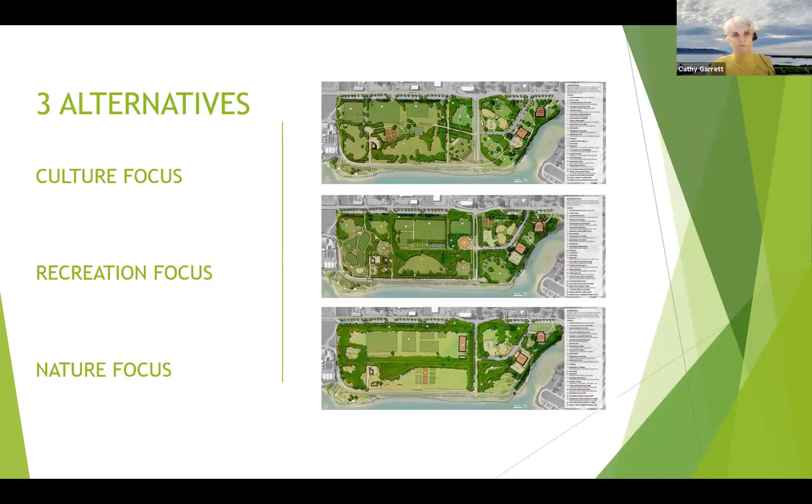So to take you on a walk through the park as seen through the focus of culture. Really at the core of this option is culture and the arts. And it's our intention to be representative of the cultures of the region, who's living here and who has lived here over the years, the centuries, and the millennia.

Starting with the longest time frame, of course, the stories of the Tolowa Dene people and events, and in more recent times, perhaps up to the Japanese sister city and the story of the boat, and finding the cultures of the city today, both Latino and Hmong and other cultures, and then reflecting a little bit on the builders of the city, and then stories of the tsunamis and how they shaped the community. In fact, they are the reason that Beachfront Park exists today after the 1960s tsunami.

So I'm going to start by walking through the park, and I'm actually going to start at this upper right-hand corner where that number 12 is, which is the main entry to the park, where there'll be a park sign, a plaza, some trees identifying the entry, and flags also identifying it. And this is using one of the park entry drives that exists today.

And the cultural core really begins here. It really hosts a gathering of spaces, interpretive signage, memorials, and they're collected along a special path, which we're identifying here with this little white hatch. And if you can follow it, it leads through a portion of the park. There are many paths in the park, but there's some that we're actually designating as part of this cultural core.

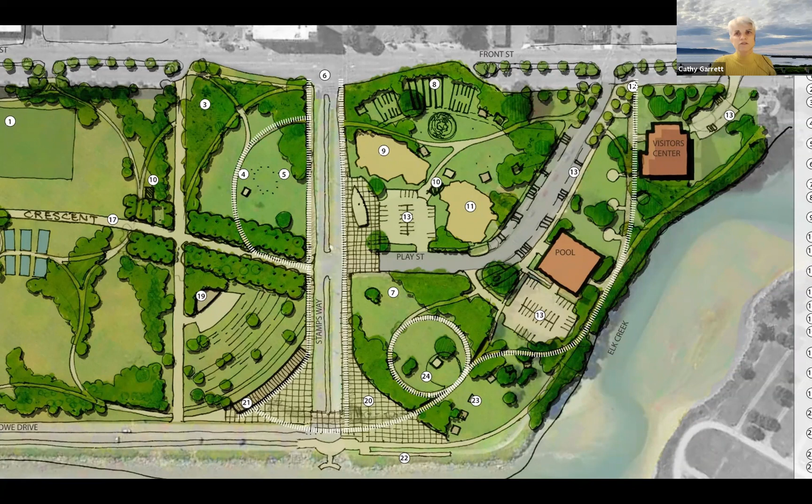So one of the things that came up in the community discussions was the value and interest in trees and massings. And you can see in this scheme, there's significant massings of trees. They'll help buffer the wind, and they'll help define spaces.

It's opportunities for a range of diversities for enhanced habitat, and looking at using both native and climate adapted species, species also of cultural utility and interest. And so the masses of trees that you see here will carry those elements. We can drill down later in the question and answer period if we want to know more about that.

The other thing that we've got here, identified with number 3, near 4 and 5, is the ethnobotanical plantings for education and interpretation, and perhaps guided seasonal tours of plantings useful to the Tolowa.

So that takes us to, if you sort of zoom out in your mind's eye and think about the layout of this overall park master plan, and think about circulation, as I said, we would look to reuse infrastructure.

Stamps Way, of course, is there, as is Play Street. We're using both of them, and we're continuing Play Street on with this new pedestrian promenade, which is central to the park. We're seeing what's called the Crescent. It leads to a covered picnic area, which would serve the ball fields in the upper left, and also the smaller courts to the lower right of that area. There would be a new bathroom at number 10, and actually there's another number 10 at the other end of the crescent, showing this important organizing element of the pedestrian circulation.

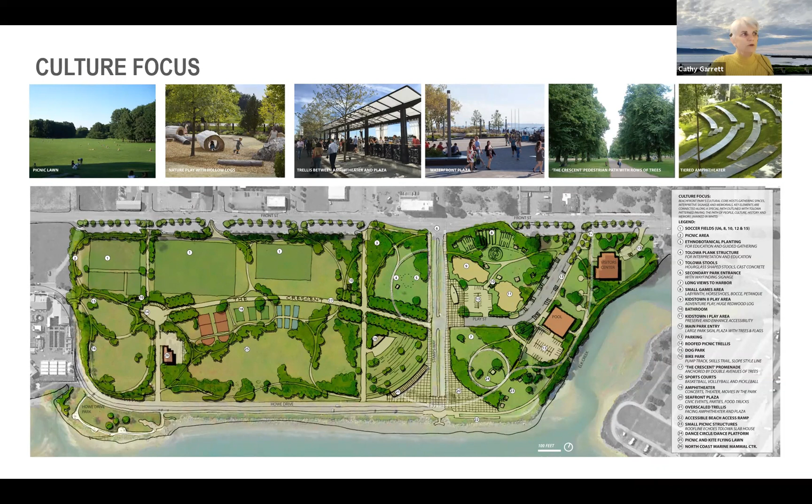Of course, the Marine Mammal Center is at number 26. Then as you move around, looking at number 16, that's where the bike park is. It's shown fairly simply by an area identified for it, but it would accommodate a pump track, slope style line, and skills trail, really a place for the whole family. The dog park is located in the area described as the lobe at number 15, and then you can see the soccer fields at the upper portion there, making the loop back.

In terms of small courts, if you continue on towards the east, you'll also see some additional small courts, horseshoes, bocce perhaps, and then a circular labyrinth there. That brings us to the area around the existing parking, which has been clarified, retaining the existing kids' town and improving it, expanding to bigger kids and more diverse ranges of play, and a memorial boat plaza there, but also that could be a play environment for kids to clamber and climb on, around a range of picnic facilities also in that location.

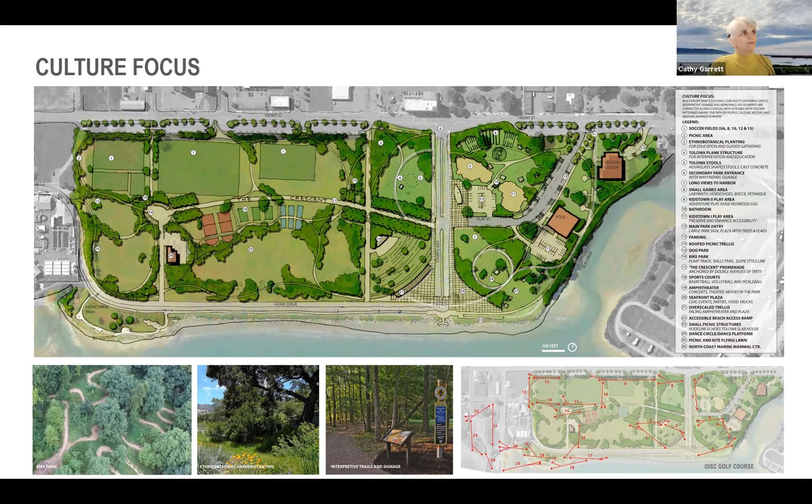Which brings us back to the beginning, and with that, I'm going to hand it to Mark Wessels to discuss the recreation focus. Thanks, Cathy, and thank you everyone for being here.

I'm going to discuss the other two options, which are recreation focus and nature focus. To begin with the recreation focus, Crescent City is already a recreational destination for Del Norte County and for Northern California, with great recreational features adjacent to it, from the national parks to mountain biking trails, hiking trails, as well as water recreation. This scheme aims to make Beachfront Park a rich recreational hub that serves both residents of Crescent City as well as visitors to the city, always trying to balance the needs and in every way maximize recreation in the park.

To begin on the left side of the plan, this option shows a large bike park that has a pump track, slope style line, as well as a skills trail that traces around the edge of this bike park. Also integrated into that bike park are seating areas and picnic areas so that family members of bicycle users can hang out in this bike area and overlook kids or other family members doing bike activities.

Right next to that is a dog park surrounded by a wooded area. And next to that, shown by number 2 here, is a picnic area, which we could see as serving this bike area, the dog park area, as well as adjacent businesses across the street.

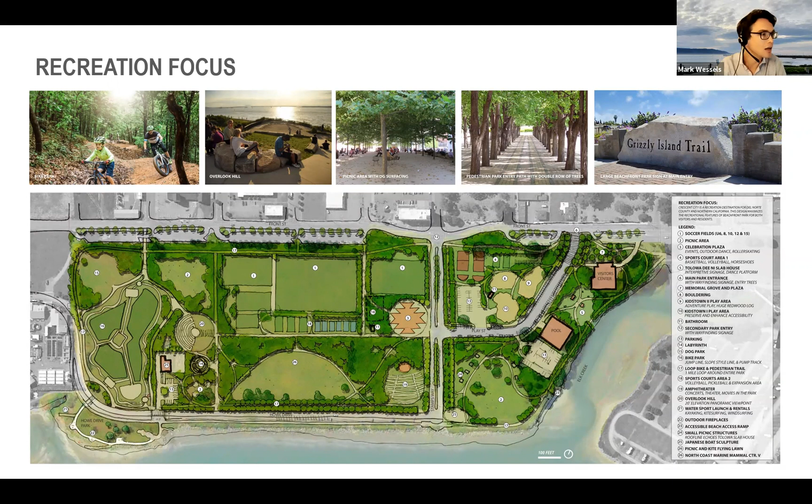Just below that, at number 19, is the amphitheater area. In this scheme, the amphitheater is the most built and constructed, showing a covered stage as well as accessible seating for visitors. The idea is that this could be used both for residents of Crescent City and for larger events—inviting a larger group of people into the park for a movie night, an interpretive talk, a dance performance, or a school play.

The final element I want to touch on in this scheme is recreation on the water. One of the huge resources you have here in Crescent City and at Beachfront Park is Elk Creek, the bay, and the Pacific Ocean. In this recreation scheme, we wanted to offer water-based recreation integrated with the park: an accessible kayak launch, a water sport launch and rental area where visitors could rent kayaks or take a windsurfing lesson, and a place where locals can get access to the water—providing ADA access to the beach and launches so people can get into the water itself.

With that, I'm going to move on to the nature focus, and we will have time for questions following this.

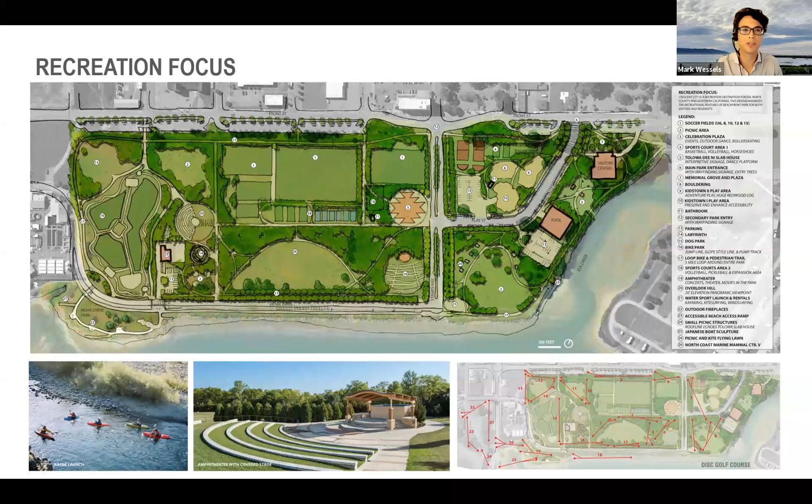There's also the opportunity to create narrower, smaller paths adjacent to that. On those paths, we could integrate optional mountain bike features or exercise equipment like a pull-up bar or a bench for push-ups, providing a varied set of experiences where people can get exercise and get out into nature.

Before I go further, let me step back and say what we're trying to achieve with this nature scheme. Since Crescent City has such amazing natural resources, access to the redwood forest, Elk Creek, the bay, the harbor itself, and the Pacific Ocean, what we want to do with this scheme is provide opportunities for people who live in Crescent City and visitors to connect with nature. That's the focus of this scheme and every piece of it.

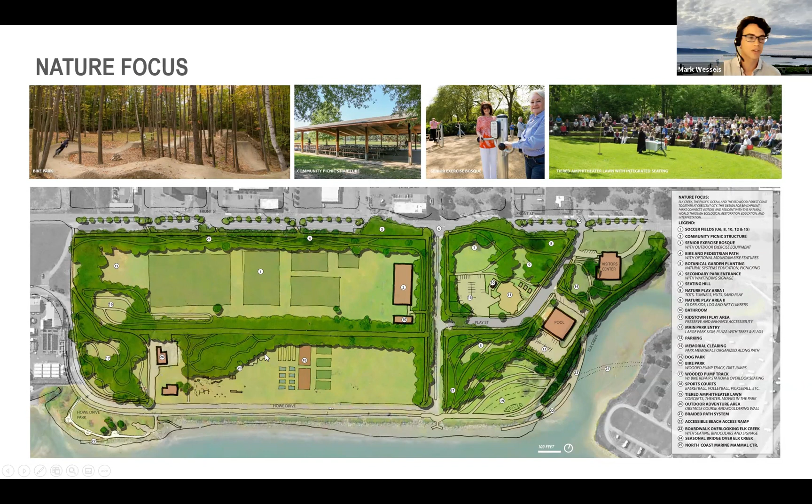To finish up this scheme, I'll just point out the smaller courts located here, some walking paths off the main spine, an area for water sports rentals to connect with the natural systems of the bay and the beach, some obstacle course features similar to a Spartan race type obstacle course, and finally a bouldering wall. This boulder would be a place where kids could play as well as rock climbers could practice their rock climbing.

The final big feature of this scheme is number 23, a boardwalk arching out over Elk Creek. This boardwalk would provide an overlook to look at Elk Creek and out at the Crescent City Harbor. It also has an arm that comes down and ramps down to land on the beach, providing an accessible route to the beach, so you could stand on this and look out.

We imagine interpretive signage here, as well as maybe binoculars to look at wildlife on Elk Creek or out in the harbor. We also show at number 24 a possible seasonal bridge crossing Elk Creek.

So I'm going to pass it back to Cathy to recap the three schemes.

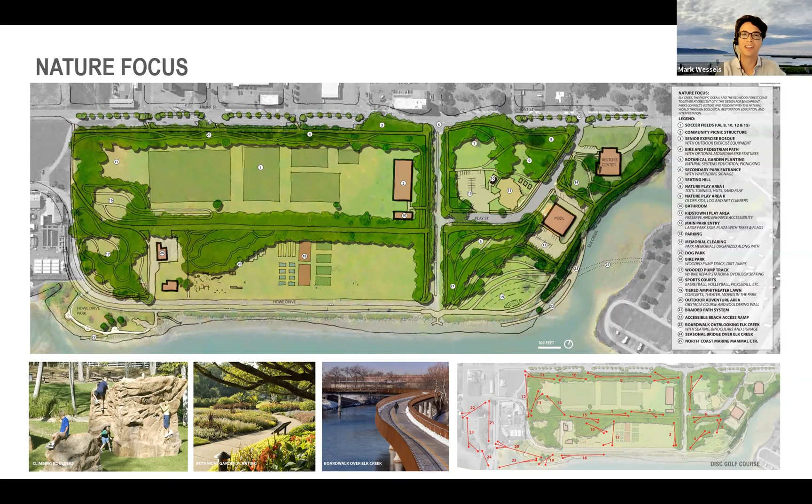So that was a romping tour through the three schemes. We're so looking forward to your thoughts and comments. We really believe that everybody's input will make this the best thing it can be. You can see that there are different priorities, and we've broken them out thematically to really allow us to explore an idea in each scheme. But ultimately, at the end of the day, what we really see is that preferred elements will probably be married together so that we get the best of all possible schemes.

So with that, I'm happy to open it to question and answer. And that's great, the poll is up there. People have preferences, and we'll see where that goes.

So I did see some comments in the chat bar about questions. There was a question about the size of the labyrinth. Obviously we're open to guidance and input, but on the order of a 40-foot diameter, it's a good-sized one. Labyrinths are usually defined by the number of circles they have, and 11 is on the large end, and that's what we had in mind.

I also saw a question about the number of bathrooms. In option A, there's the existing bathroom plus two more. In option B, I believe there's two, but Mark, please correct me if I'm off there. And in option C, the nature one, there's the existing bathroom, number 10, plus an additional larger bathroom near the community picnic structure. So all options have an improvement to the existing bathroom, and all have additional new bathrooms.

So you might go to the park with the kids and then have a picnic afterwards—there's a number of picnic structures. In scheme B, the recreation one, there are picnic structures just to the east of Stamps Way, and also in area 5 where there's a picnic area, more Tolowa focused, but with picnic opportunities there too. In scheme C, there's a very substantial picnic structure for a community group, a Boy Scout group, or a weekend celebration of disc golf, with people coming from far and wide. So there's a range of different experiences, whether smaller scale or larger scale.

Another question about our fabulous weather here in Northern California: irrigation is an issue. I'm assuming there will be irrigation to keep all the vegetation alive. Will it be the gray water from the sewage treatment plant that was in the operational and funding contracts for the plant? I'm not really sure about that, but can you address irrigation as well as the drainage and rain flow patterns, and whether you've taken that into consideration with these designs?

Starting with irrigation, we agree irrigation will be of value for year-round benefit, particularly at the sport fields. But generally, we may elect to not irrigate some areas, that'll be a choice we'd work through with the city and the community. We've worked with various cities, and some people love to irrigate, others like to let the seasonal change show. If we were to go primarily with a nature scheme, there may be less irrigation, for instance. As to whether we would use gray water, we would love to. We have in-house irrigation experts in my office.

It's a little bit more fine-grained than the nature of master planning, but the things to look at for graywater, of course, is to separate it from potable water absolutely clearly, and also to make sure you do a regular chemical analysis so you don't get a buildup of things that make plants not prosper. For instance, if there was a locally high boron level, over time the trees would start to falter. So that's just something to watch.

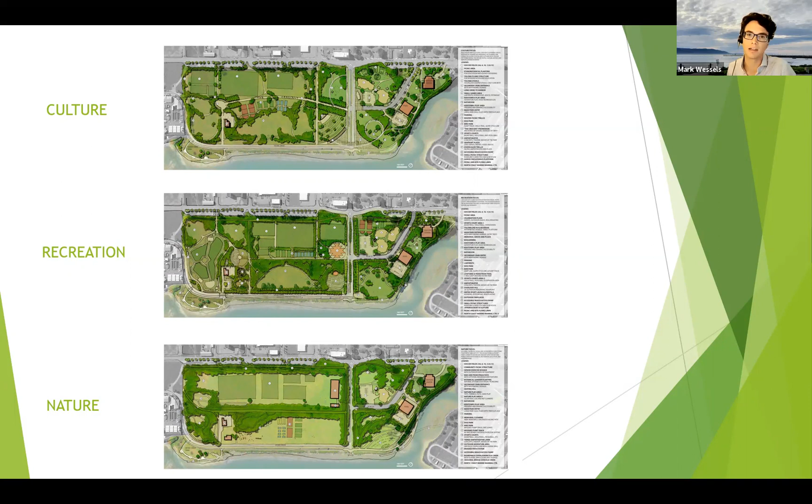There's a couple more questions. One was about signage, and yes, signage is going to be a big component—that is a major important part of this. We're going to have signage at the entrances for certain.

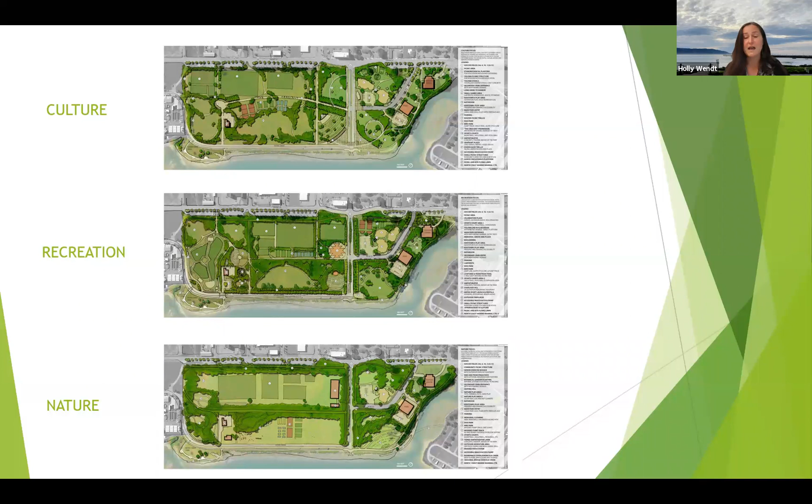We're going to go to a screen here. There is a survey that we're hoping each and every one of you fills out. You have the option to do the survey as a family group. If you're a teacher or educator, you can do it in a classroom setting. If you're a group like the Labyrinths or Disc Golf group, you can do that together as well. What I want to talk about is our timeline.

COVID put us a little behind the ball of what we had hoped and presented to you before, but we are nonetheless on track for moving forward for grant applications and meeting deadlines, and we're excited about that. So community input, the survey, and any input we want to get to Mark and Cathy, we're going to end that on Monday. That gives you time to share.

This video will be posted on YouTube. If you think there are critical people that didn't see it, you can direct them to YouTube and the survey, and we'd love their feedback, and they can hear everything you just heard from Mark and Cathy. But we really need that in by the 12th so that these lovely people and their team down in Oakland with PGA Design can get us a draft of the preferred plan.

We have to take that to the Planning Commission and then to City Council. And then hopefully we'll have a plan that everyone can be proud of and had voice in for December.

We have a grant application we're already working on that we want to get in by the 14th of December for Prop 68, and we're going for the big pot of money of $8 million. Because of all the input we've gotten from the community, the wonderful work, and having the blessings of working with our tribal governments, we're really hoping that we get that $8 million to get this project going.

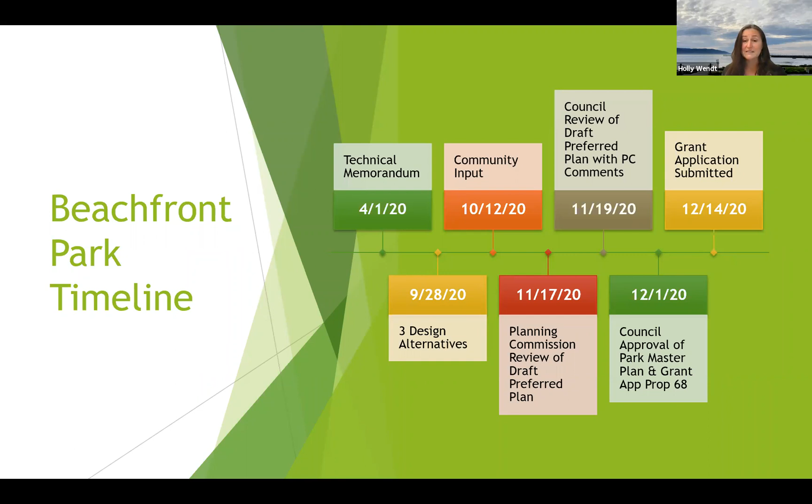So the most important thing we can ask of you to do right now is go to the Crescent City website, go to the link, and do the survey. There's a variety of ways you can do that survey - as a group, as a family, as a teacher. But really, the more information we get from there, the more it helps Mark and Cathy and their team.